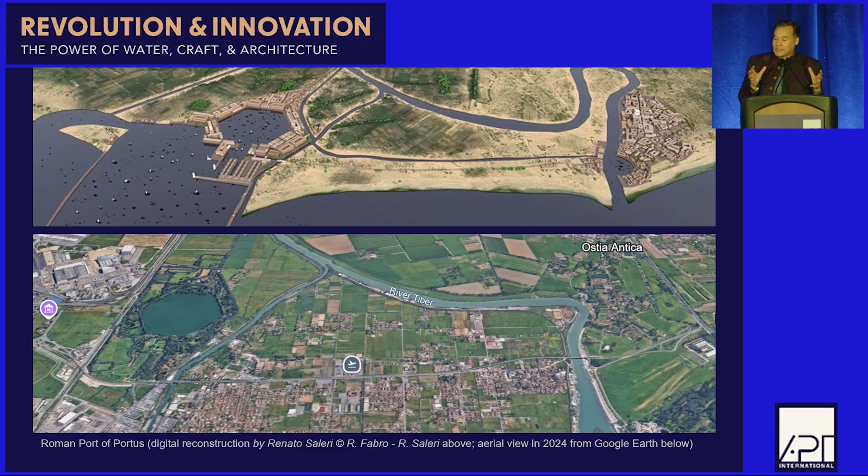Another example I love - I hope you'll take some joy in this digital reconstruction, not mine, but one I borrowed - is the great port of ancient Rome. Though it had been used for at least 1,000 years before, in the 2nd century the Emperor Trajan said we need a much more monumental port that protects ships from the ravages of the sea while allowing a large amount of shipment movement. This hexagon you see is the port; each side is 1,000 feet in length. I use this example because, looking at a Google Earth image today, anyone who has flown into Rome's Fiumicino Airport has gone right over this - the airport is just to the left. This massive engineering feat still marks the landscape 2,000 years later, though they've reclaimed some land and the sea is further away. But this hexagon of a lake still remains.

So I take you on this little tour to highlight something I don't think we often think about enough, which is the fact that our global cultural landscape is replete with amazing feats of engineering related to water - incredible water heritage that we can learn from, and that in many cases we can actually rehabilitate and use in a dire time.

Before I give examples of how we might address this, I thought a lecture on water has to talk about both extremes, too much and not enough. So we'll start with too much, and with that we're really talking about cataclysmic flood.

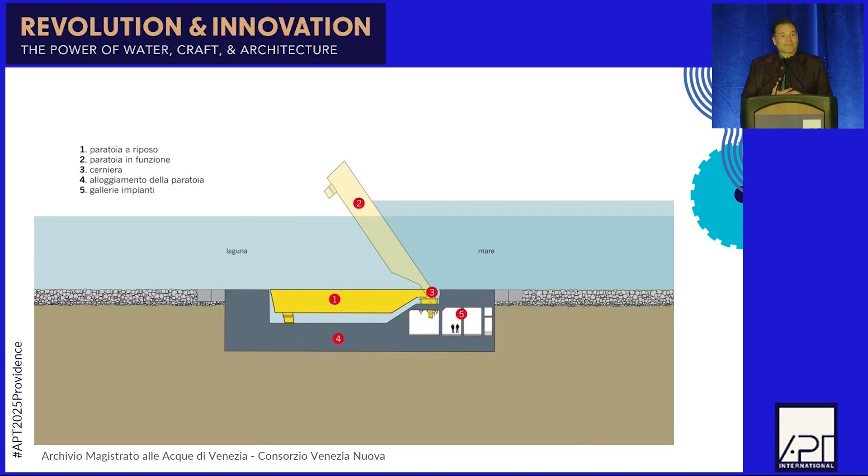Now, the challenge of this, first of all, this is an incredibly successful engineering feat, a very expensive one, but successful. Since 2020, they've been able to fend off the acqua alta from lapping at the feet of the heritage buildings in Venice. The challenge is in its success. Venetians think they are safe from sea level rise. Well, we have MOSE, you send the air in, it shoots up, and it's going to keep that seawater out.

It's not designed for that. It was never designed for that. The fact is that with just 50 centimeters of sea level rise, which is well within predictions for 100 years, but even within 50 years, the MOSE system would have to be constantly deployed.

That poses two problems. One, the Venetian lagoon, which is the largest wetland in the Mediterranean basin, would become a stinking, rancid cesspit, because that ecosystem relies on the continual movement and refreshing of seawater. So the ecosystem would die, and of course all the human activity would cause pollution that would sit there. That would be a big challenge.

The second challenge is that the MOSE system would no longer work against these seasonal tides or storm surge or anything like that. It would quickly be overtopped. So again, this is a purpose-built solution that highlights our ability to develop solutions, but sometimes our short-sightedness in just handling the challenge in front of us, as opposed to thinking further into the future.

And more with climate change, we see these challenges. The 100-year flood becomes the 50-year flood. All of these things are happening on shorter terms, and we're seeing things last longer, or less time. I'll give you an example. This is actually a World Monuments Fund project, successful but short-sighted.

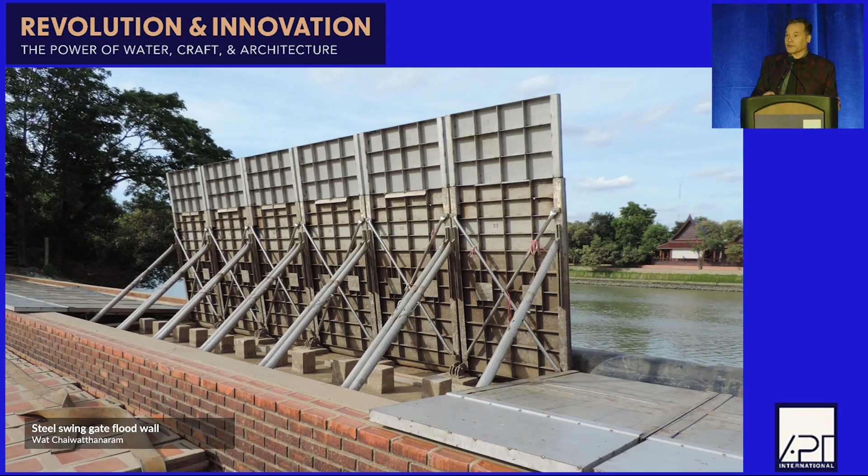Here it is in full deployment, providing an additional 2.7 meters of protection from the river water or any flood waters. You can see it here along the eastern perimeter of the site, right next to the river.

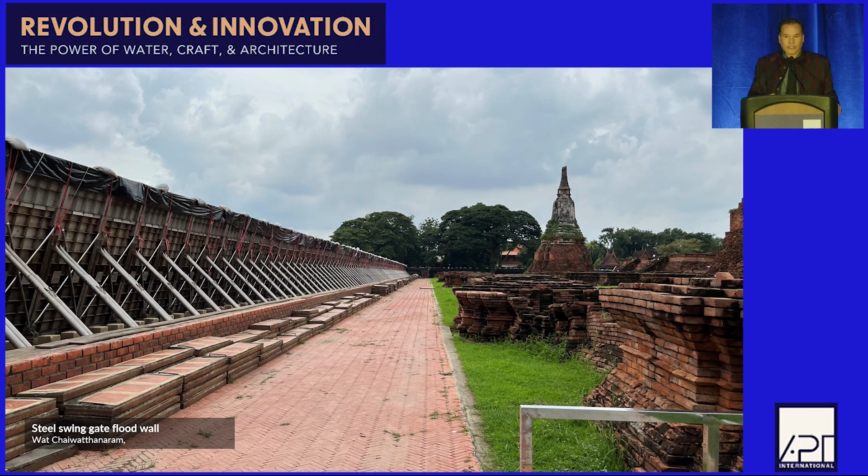We also had to rebuild a failing flood wall on the south perimeter of the site. This is a permanent flood wall that also provides this 2.7 meters of protection.

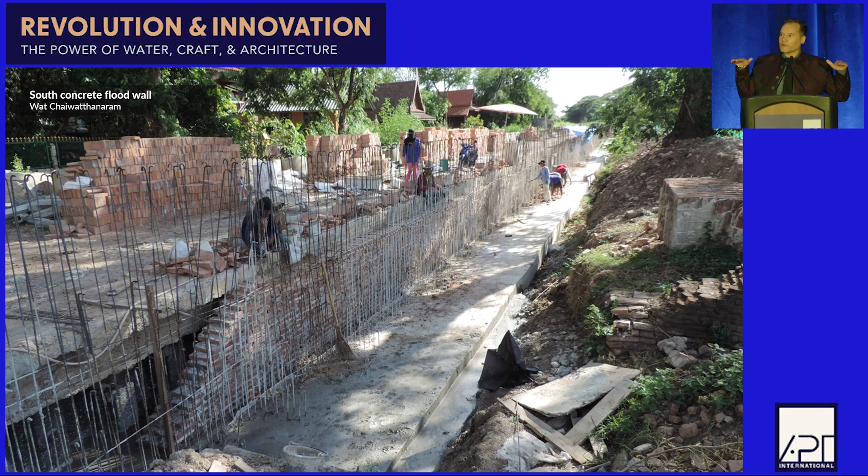Another example of success. Sadly, very soon after completion, we were able to test this. In 2022, another major flood, not at the level of the 2011 flood but still quite severe, occurred. You can see to the south, lower left-hand side, all the buildings sitting in water, this whole flooded landscape, but the site remains dry.

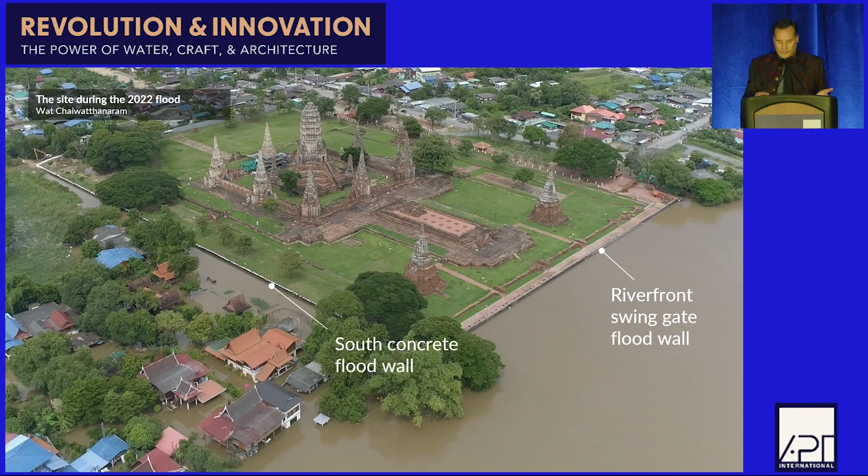Again, we designed for what we thought was coming, and climate change has provided new challenges. We need to be adaptable in our thinking and in our engineering solutions.

Before I leave floods, I thought I'd bring it a little closer to home, to LA, and again an engineering solution and strategy. The LA River, you can all picture it, largely a cemented channel, 51 miles in length. We'll come back to that.

How did we get there? Well, it was a natural river that meandered and changed path quite a bit. But at the turn of the 20th century, there were 3 major floods within 25 years.

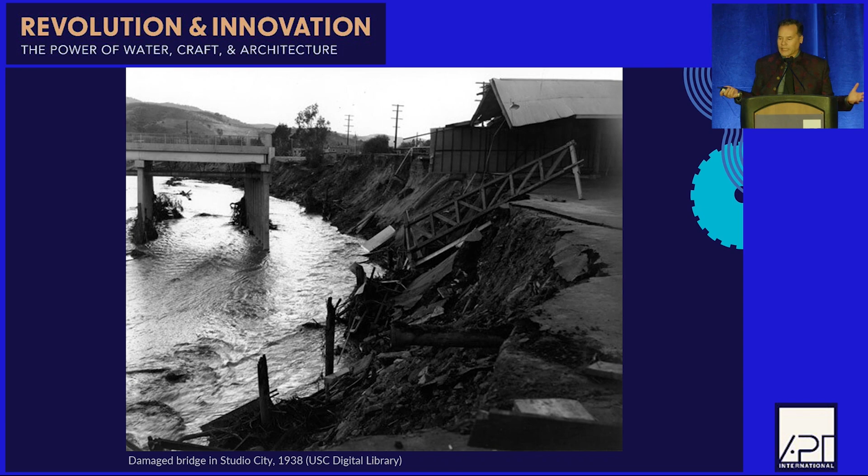The waterways couldn't handle this, the ground couldn't handle this. You can see the damage to infrastructure and property, and you can imagine the torrents of water as well as this watery landscape that suddenly became this metropolitan area of LA.

115 people died, 6,000 homes destroyed, over a third of greater LA underwater.

So what happened? Well, after that third flood, the people of LA were fed up, and they already had plans in place. Literally, once the water receded in 1938, they began the work.

To a room full of engineers and architects, these numbers are important and impressive. In 20 years, 20 million cubic yards of earth had been moved, 3.5 million barrels of cement poured, 147 million pounds of reinforced steel used, and 460,000 tons of stone to create the LA River as we know it today.

Now remember, the focus there was we have too much water. If we want to survive, if we want to thrive as a metropolitan area, we need to get that water out of here. And what many, even Angelenos, don't know is that still today many of the roads and streets...

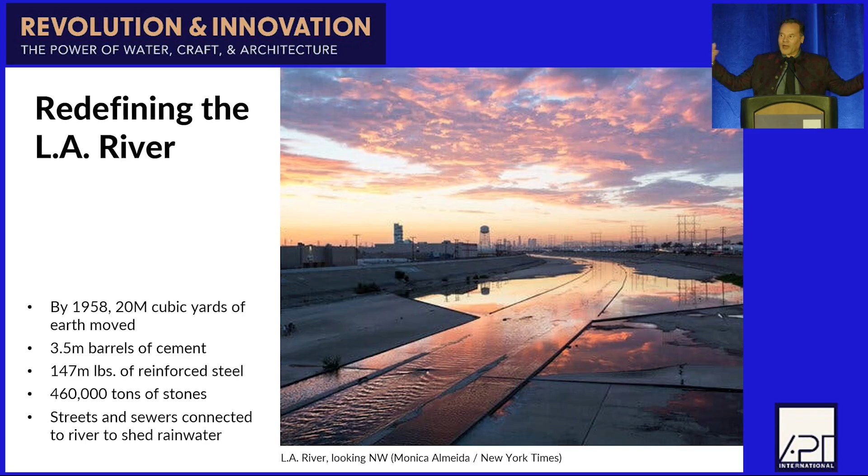That system is considered part of the flood control system. They are meant to convey water. I have been in many meetings with engineers in LA telling them they have to stop worrying about their cars—too bad, it's part of the flood control system. And all of that water is diverted into the LA River.

So, 51 miles of concrete, and the only purpose is to get the water out as fast as possible. At times, it flows as fast as 45 miles an hour, from the mountains all the way down to Long Beach, where it enters the Pacific Ocean.

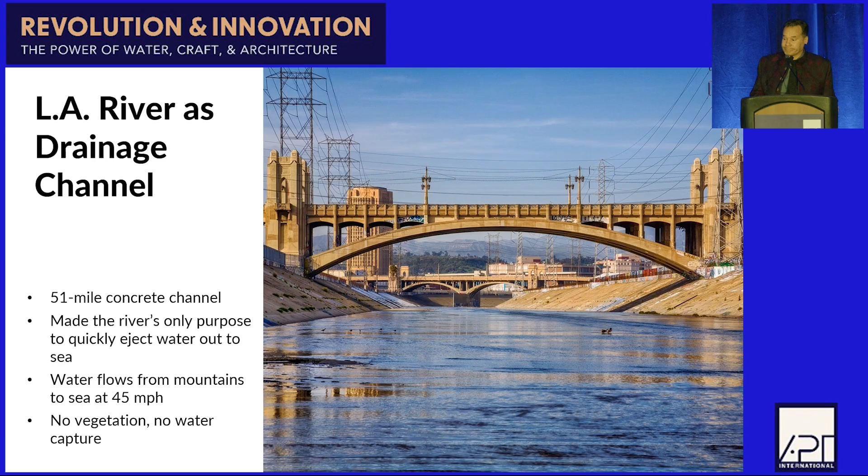And of course, many of you know that as we turn the page and think about the other extreme, not enough water, LA is a place that very much suffers from that. And so now, the efforts are to re-green, tear up the concrete, create new opportunities: one, to slow the water, create habitat, enjoy the benefits of urban cooling from more green space, biodiversity, but also stop the water and try to capture some of it and replenish parched aquifers.

And there's now a plan in place as of 2022 to do this. This has been done in little patches as money was made available and jurisdictions agreed and all of that. But now there's a plan to do this for the whole 51-mile corridor, $24 billion. We'll see if it happens.

And so we turn to the too much or too little and never enough water chapter, right? And I think it's good to stay in LA for a moment with this. I love this map done by Stephanie Pincetl at UCLA, who has studied the management of water throughout LA County for a number of years.

And this shows the percentage of water in these various jurisdictions that is imported. And you can see that the western half of LA County, large amounts, at least 80% of the water is imported, often from as far away as 300 miles. Think about the conveyance infrastructure that's in place, the energy to do that. This is not gravity-fed water. Sometimes this has to go up over mountains and come back down. Huge amount of cost and effort to bring water because there's not enough.

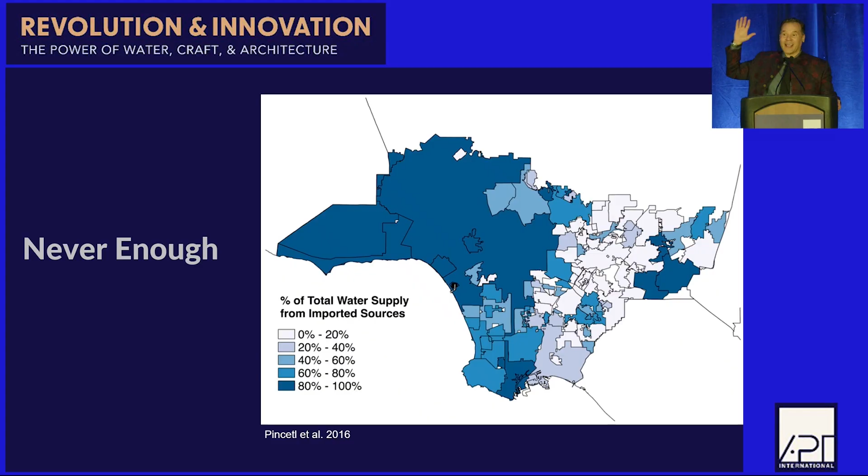And yet you've got this 51-mile channel that's capturing all the storm water and throwing it out to sea. So what do you do in a case like this? Well, you have to rethink your infrastructure. You have to think, how can we be more sustainable? And you also need to understand the very harsh complexity of the LA landscape.

5,000 square miles is LA County in area, over 10 million residents, 88 incorporated cities, and huge unincorporated areas. And then when you add the water landscape to that, you have over 200 public and private entities that manage water, bring water, sell water, store water, capture it, manage groundwater basins. They all have different agendas.

Any of you who've seen Chinatown, that classic movie, you have a sense of the Wild West that was water in LA, and that unfortunately still is. And so you have to bring everyone together.

And LA County created a county water plan a number of years ago. I had the honor and privilege of helping to pull that together at its beginning, and hold a number of stakeholder meetings to bring people together, all these water entities, to try to plan together, as well as the various jurisdictions. And now they have a shared vision and a lot of targets, but a lot of work to do. And by the way, on average, 60% of the water used in LA is imported.

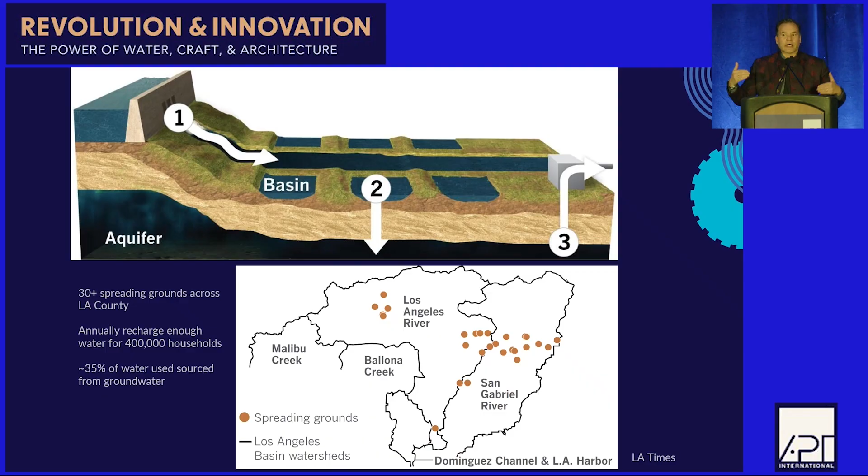And so you see here, I think you all know the science, the concept behind this, but basically putting into these large areas retention basins that hold the water and let the water percolate down into the aquifers. And then eventually that water is pumped out. And you can see on the map here some of the 30-plus spreading grounds, these huge areas that hold water and allow for groundwater recharge across the county.

Just some images of infrastructure. This is Morris Dam, historic infrastructure itself. It was built in the 1930s by the city of Pasadena as an impoundment dam just to hold water for drinking for their city residents. It is now owned and operated by the Los Angeles County Flood Control District and is part of this flood control infrastructure, but it also controls that flow. And by the way, I should say this is a beautiful Art Deco structure. I had the pleasure of spending quite a bit of time at this dam, and it's a really incredible structure.

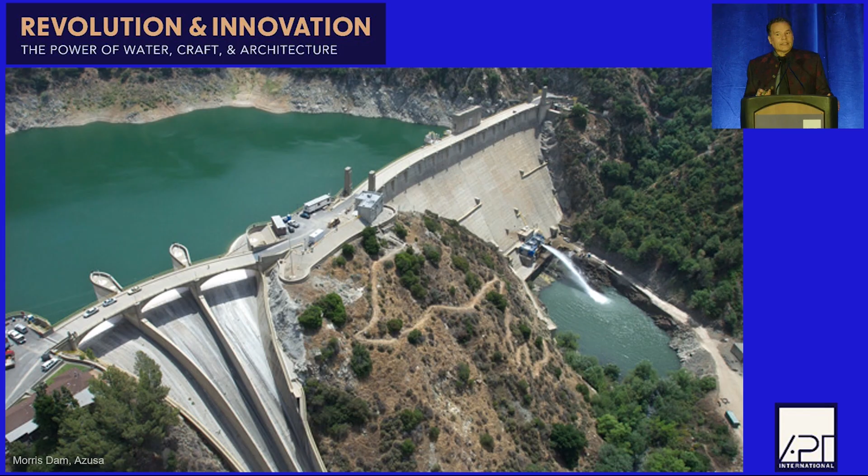It does not handle that much, it handles less than half. And of that, only 27% is recycled. They have a mandate in 10 years, by 2035, to move that to 100%. We'll see if they make it. But all these are coordinated efforts to be more sustainable in water management and to adapt and reuse the infrastructure that is in place accordingly.

So let's go to the global stage. I put these numbers up because these are numbers we should all have in our heads. I'm going to paint a little bit of a dismal picture of where we're headed in terms of our water future. The reality is that as many as 3 billion people today experience water shortages for at least a month a year. That means over the course of the year, it could be multiple days that add up to a month where they do not have the water they typically rely on, and they have to come up with other solutions or immediately change their behavior.

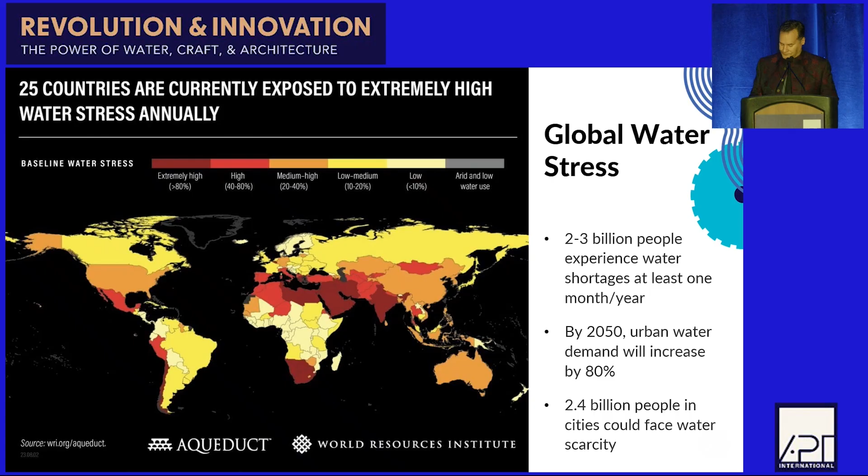And this is where I say heritage has a role to play, particularly water heritage. Remember that very short tour I took you on—there is tons of historic, and sometimes quite ancient, water infrastructure scattered around the world that sometimes is just sitting there, waiting for a little TLC to start up again. I want to talk to you about two projects we've been doing at World Monuments Fund to rehabilitate existing, in some cases very ancient, water infrastructure and bring water back to communities.

So we go to Nepal and the Kathmandu Valley. Looking to the left, Kathmandu is this area right here, that big dot. The valley of Kathmandu, for decades now, has had a much higher water demand than supply—three times the demand of the supply they have. A lot of challenges: they're over-pumping groundwater, bringing water in from other places, and now they have a huge project to build a dam 20 miles away, hold water, and bring that water in to try to feed the need.

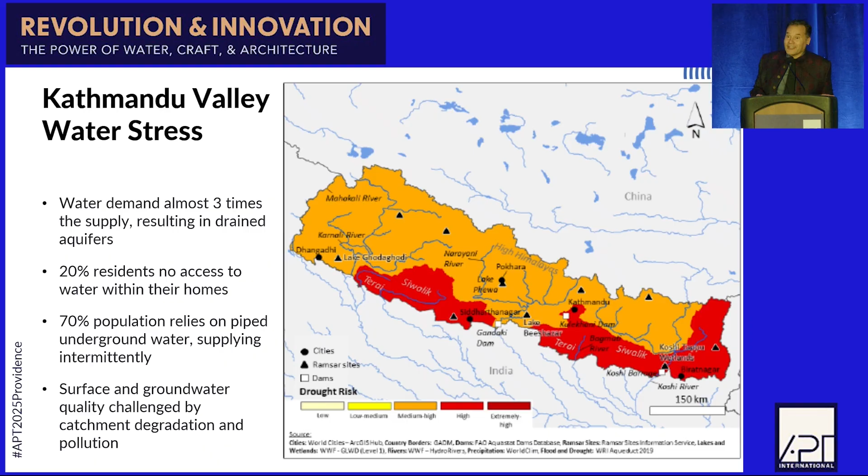There's a very ancient network of systems known as Hitis or Hitimanga throughout the Kathmandu Valley associated with the Newars. We don't really know how many there were at its height, but we know there were at least 1,000. They date back to, the earliest records of them go back to the 6th century. So we're talking 1,400 years of infrastructure that has provided water, and for many centuries was the sole source of water for many members of local communities.

But in recent years, that's the extra supply, how you fill the gap when the water you normally rely on is not there. And the challenge is, as is often the case with infrastructure and heritage that's taken for granted, these things are disappearing. Of the 500 extant Hiti systems, only about half of them actually still provide water.

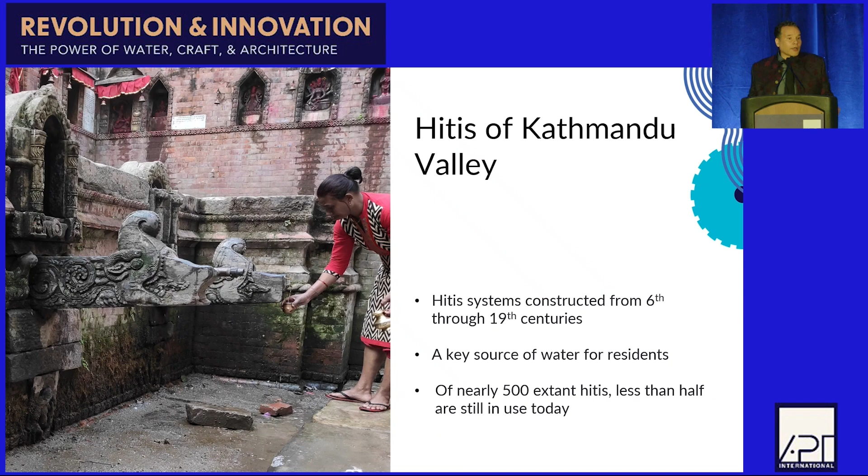And this is a very common scene throughout the Kathmandu Valley. If you walk around, you will eventually end up at one of these Hiti complexes with people collecting their daily water. A lot of people use it for drinking, but it's mostly used as gray water—for laundry and cleaning and bathing and all that other stuff.

So how does this system work? It's pretty simple, it's gravity fed. It's an underground channel, usually constructed of brick with terracotta elements, that taps into an aquifer. Because you're in a valley, it can tap into an aquifer uphill and have a nice grade going down, and that water rolls down and comes out to that distribution point.

So pretty simple, and many of them have worked for centuries, even at least a millennium.

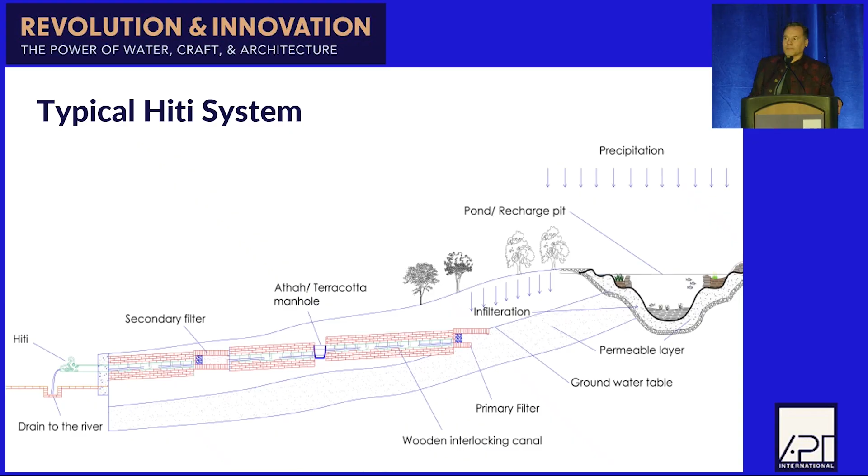So what's the challenge? Well, those of you who may have known Kathmandu in the 70s or even 80s may know a city covered with small ponds and water bodies all around. These were basically retention basins, areas capturing stormwater, holding it, replenishing the aquifers, over and over again. Most of those have been drained and filled, and often built on top of. There's also very little green space that remains, and this hardscape landscape means it's very difficult to replenish groundwater.

The other challenge is if you look at that brick underground subgrade channel, these are not mapped. So there's very little understanding of where they are, and there is no protection at all of them.

I have heard stories in Kathmandu of informal and illegal, unfettered development, of people saying, 'I was digging my foundation for my little building, and I came across this brick channel, and it had water in it. It was the oddest thing. So it's okay, we dug up the bricks, we diverted the water, we put some drainage in, and here's my home.' And what that means is 100 meters away, a Hiti runs dry.

So there's lack of protection, and then there's a lot less opportunity to actually replenish very necessary groundwater.

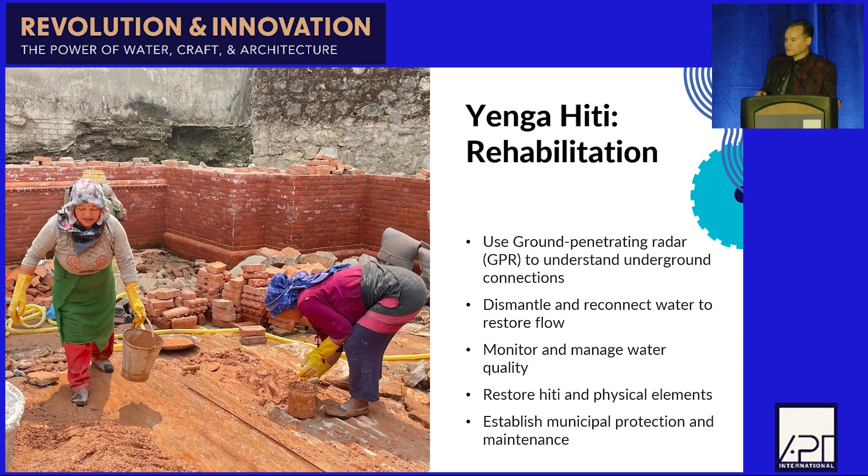Just a few images. As I said, these are places that are very important to the community, with social, cultural, and religious value. So the community members insisted that before we do anything, we have a puja, a religious ceremony, to bless the starting of this and make sure it went well.

I'll admit, a rather messy work site underneath, but you can see the work underway, getting to that infrastructure underground so we can figure out what to do and how to do it. And this image - normally a video - is the first moment that water flows again.

I had some other images I just received that show the completed Hiti system with water flowing, and it's now providing between 4,000 and 5,000 liters of water per day on average. So this has become a key part of this neighborhood and this community.

So to end, I want to take us to our last project in India. This is a bit more of a sweeping project because we've really been looking across much of the country at the water infrastructure. But before I get there, some of the stats.

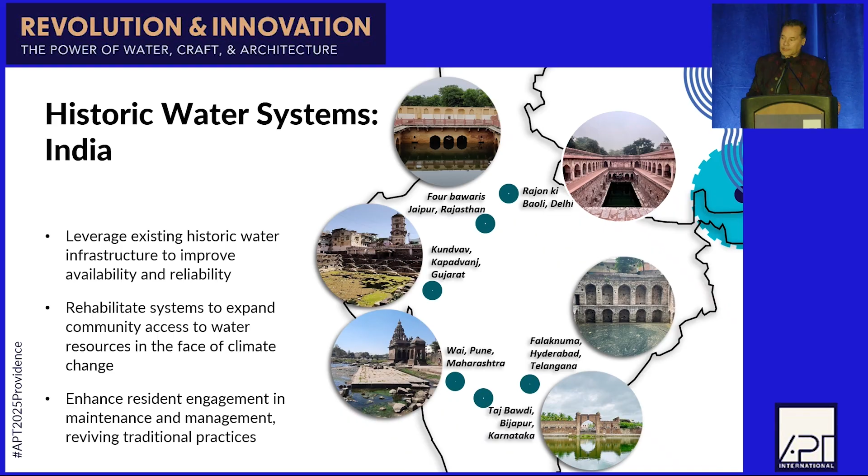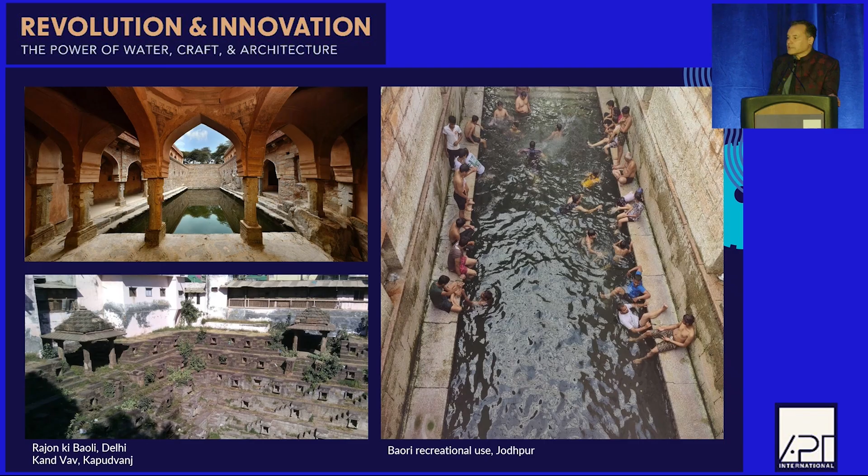Some of them even have separate areas for livestock that can come, drink, and bathe, with that water kept separate so it does not mix in with the other water. So they're quite incredible in terms of their engineering specificity and functionality, but also very important socially.

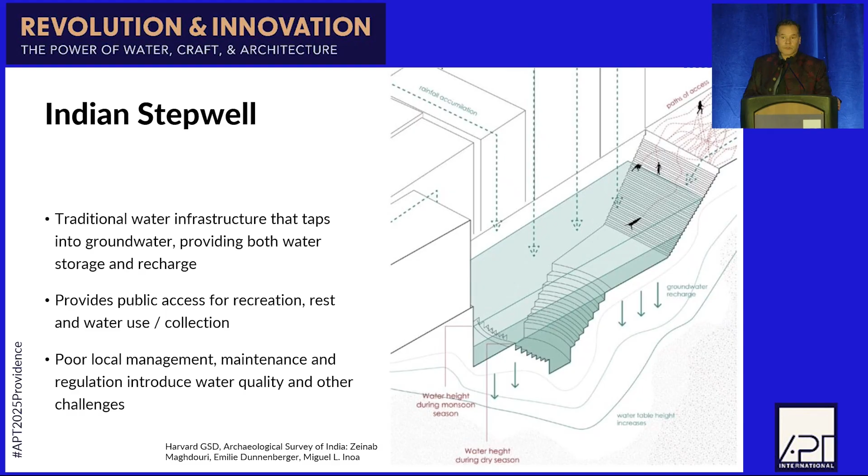So the first Baoli that we have completed is in the center of Delhi. It actually sits in an archaeological park, Mehrauli Park. Many of you may have visited - it's where Qutub Minar is. This Baoli, known as Rajon ki Baoli, is a 4-story well, and you can see the structure, the built fabric that is part of this infrastructure.

The challenge we had there, when we arrived, the water filled all 4 stories and was fetid and nasty. That was in part because there were drainage issues - it wasn't connecting properly to the groundwater, it was overfilled, and on top of it, always the problem, illegal effluent coming from nearby buildings that had not been connected properly to sanitation lines. So we first had to work with the local authorities to get that dealt with, because that we couldn't do anything about until it was managed.

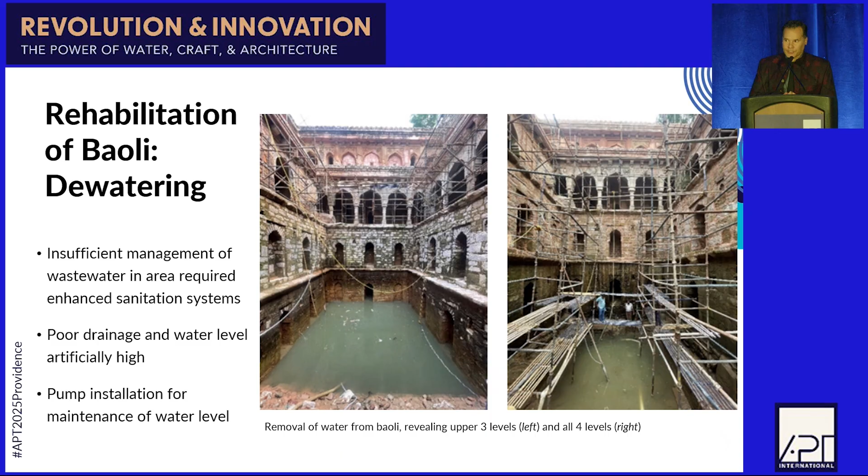Then we had to drain the water and do any sort of structural stabilization that was needed, and basic restoration, both structural and aesthetic - repointing and whatnot of bricks and stone masonry. Once we got all of that structure fixed, and all the water connections resolved and working, we were then able to fill back the Baoli, bring the water back, let the groundwater come back in, and then think about maintenance and water quality.

Now, as I said, this is an archaeological park - a ticketed place. One gets tickets to enter, and there are park grounds and all these various wonderful ruins throughout the park. So this is not a place that's going to be used by community in terms of fetching water or even swimming, but the water is used for irrigation of the surrounding green space.

And so we could be creative. I love this solution, this strategy, of putting in 4 species of fish. 3 of them eat algae and other biological growth to keep that water clean. 1 of them eats mosquito larvae, because of course we didn't want a mosquito vector issue from this body of water. We also introduced an aerator to provide enough oxygen for the fish and prevent stagnation, and then a system of regular maintenance.

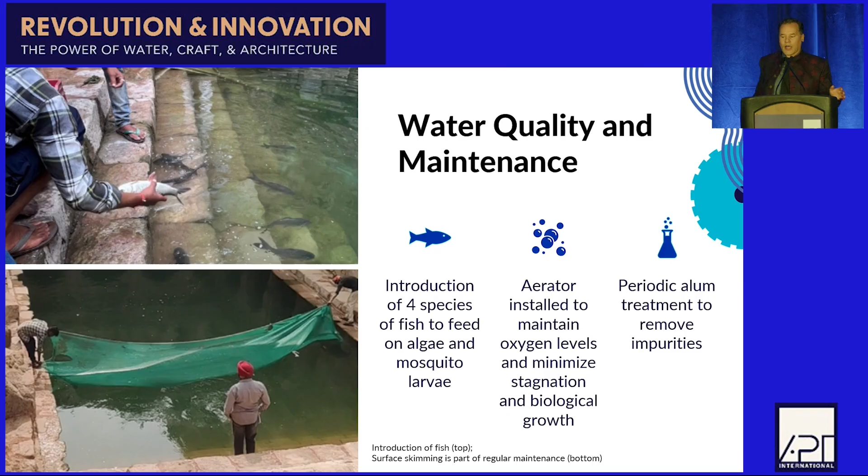So I will end there by saying that if we intend to really thrive and be able to adapt in the face of our current and upcoming water challenges, we need to use all of the tools in our arsenal. And I strongly believe that heritage, water heritage, historic infrastructure, and even traditional knowledge need to be part of those tools. That's how, together, we're all going to build a better and brighter water future. Thank you very much.